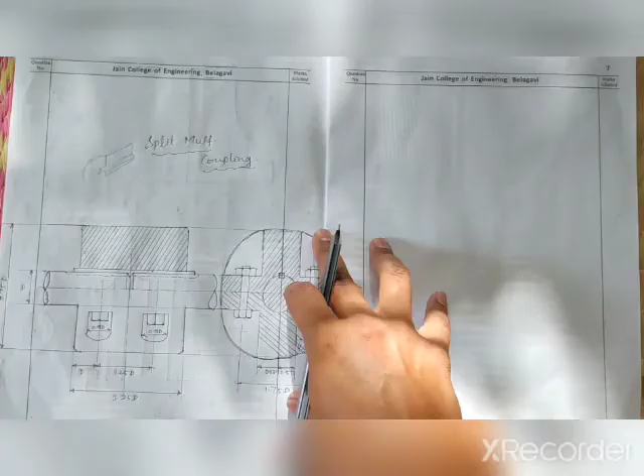Okay, we will be discussing the first type of rigid coupling, that is split muff coupling.

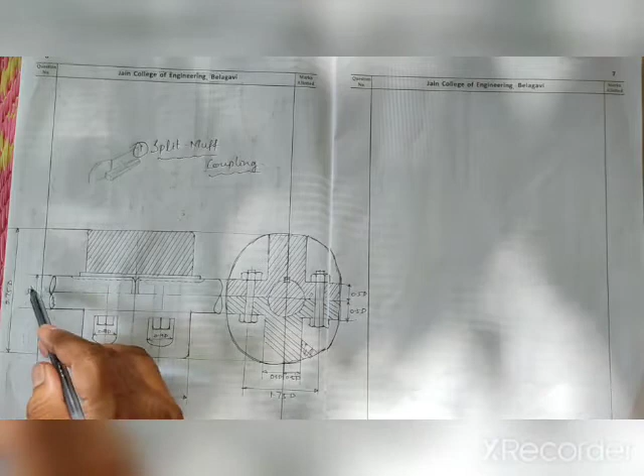Let me explain what all the things are there, then we go for drawing it. First the diameter of the shaft will be given to you, that is D. Based on the diameter of the shaft, the remaining dimensions of the split muff coupling will be present.

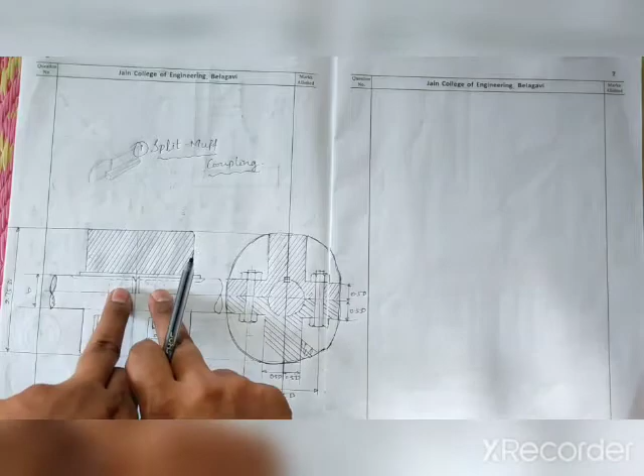Split muff coupling is nothing but a circular muff on the two shafts which are to be joined. When these two shafts have to be joined, an upper half muff and a bottom half muff will be there, placed over the shafts, and it will be tightened with nuts and bolts like this. So this is how the split muff coupling will be.

In the previous I have shown the 3D view also, I hope you are convinced with that. Now let us go for drawing the front sectional view, the front half sectional view, and the side sectional view. It's very simple, so how to draw the things?

Make it convenient according to the dimensions, you have to plan it properly on the sheet.

Now, first and foremost, you have to take the axis line, that is the chain line. Draw the axis line, and once you draw the axis line, draw off the shaft there only.

Everything you do first with thin lines itself, that will be a better way. Do everything with thin lines.

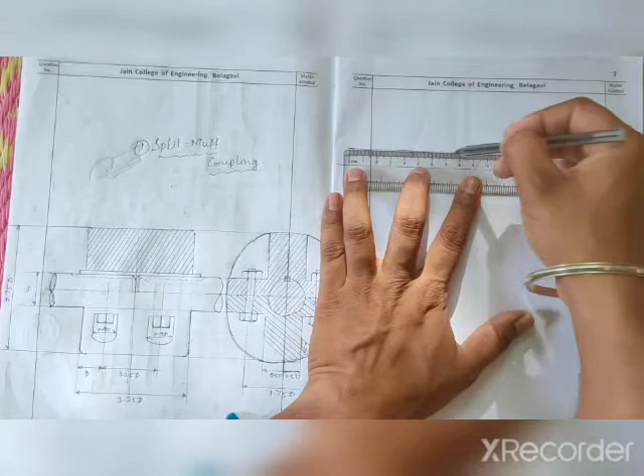Make sure I need to draw this side view here, so till here only I will take it, with thin lines.

Now let me take, for my reference, a center axis line, also thin line, for my reference I will take it as the center axis line.

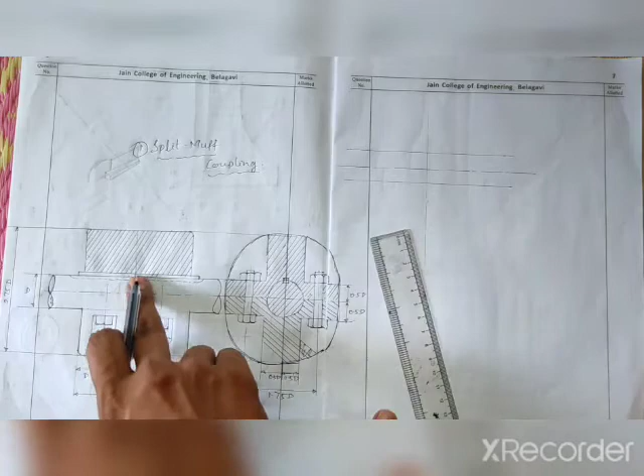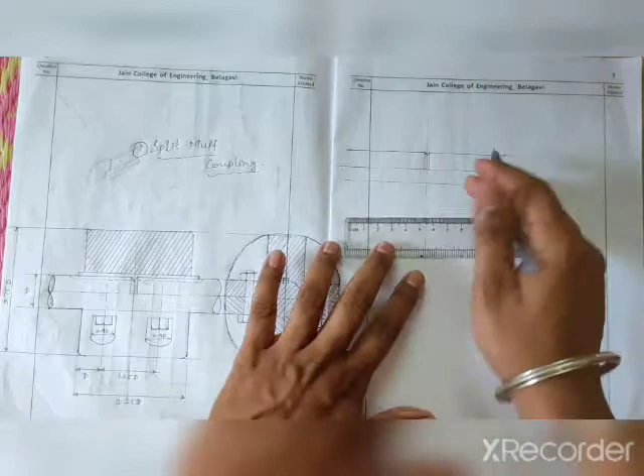Now here you can see the upper half portion, I will show it with section, so I can see the shafts which are there. I start with this point, make it like this V shape, and then draw a line here, and for this one also a line, and for this one also a line, and then here you take it straight, and here also you take it straight. So that is a thin line as itself.

At appropriate distance, let me do it later. Now let me take this width first, and draw it here on both sides, on both sides you have to draw.

So for this width and diameter you need, you can see here, this is 2.75D and the width is 3.25D. Taking these two dimensions, 3.25 into D, D meaning diameter of the shaft, and 2.75 into D, you have to calculate how much it comes.

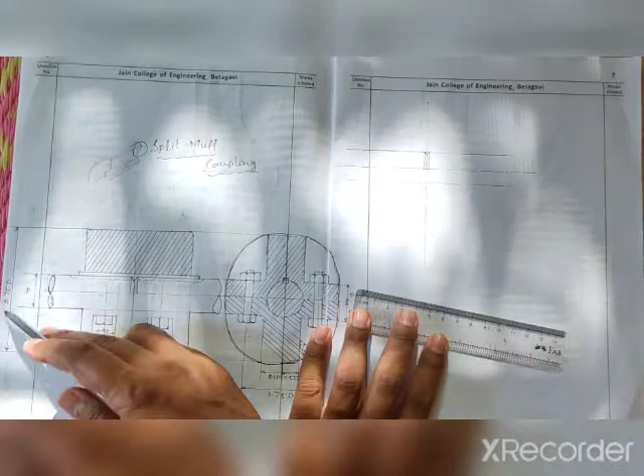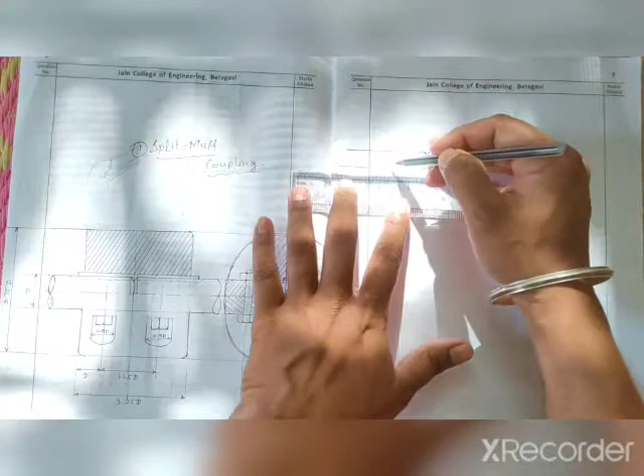If it is of 20mm diameter, 3.25D means it will be 65mm. Similarly 2.75D means it will be almost 55. So that diameter, 55, means now it will be half on this side and half on this side from the axis, half of 55 is 27.5 here and 27.5 here. Like that you have to take it.

So just mark it here, mark the points. At this point, obviously you will be working on grid sheets, just draw off the thin lines.

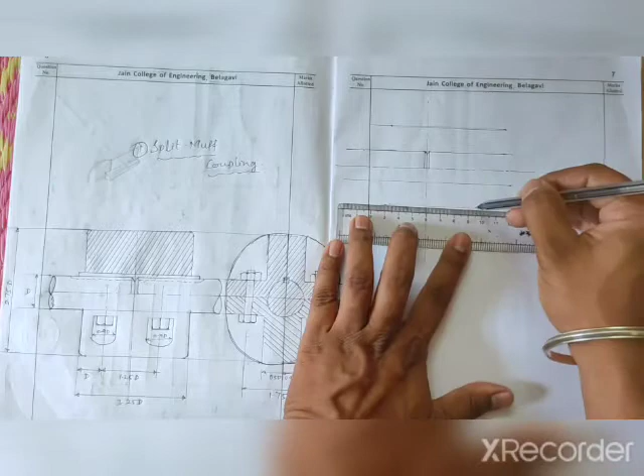Now for the width, how much is it? It is 3.25 into D, so half of that on this side and half on this side. Like this you have to work, so here again go for vertical thin lines.

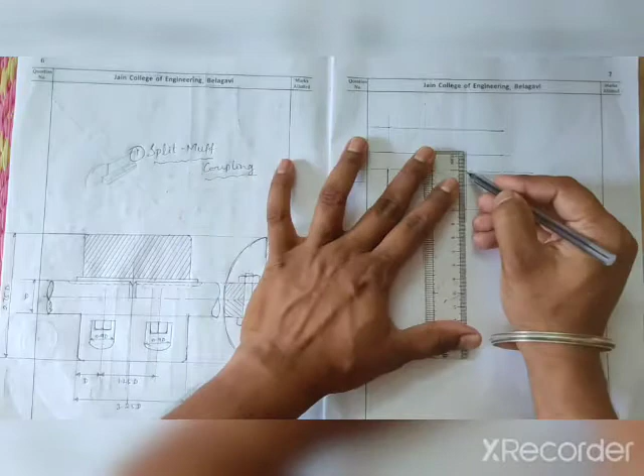Now go for making the thick lines, wherever it is required. Now this bottom portion I have to show fully with thick lines, so from this shaft, from the axis, I will take it thick till here. Corners I need to show rounded.

I will leave the corners and by hand just round it off.

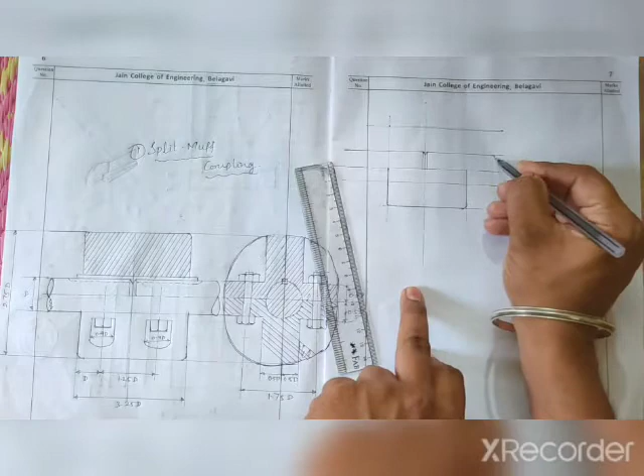Then here at the upper portion, here it is a sectional view, so now we got to know these distances. What you do is, you have to finish showing it as an endless shaft, shown like this curve. Now when you show the curve here at the bottom, you show it here at the upper part too, like this.

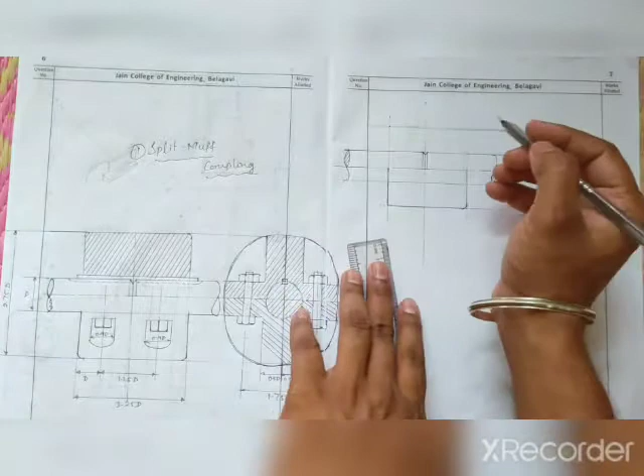So this is how it will be. Okay, now I got to know these dimensions. Here the width, how much it will be. So these two lines, now you just show the keyways.

Just with dotted lines, with free hand only, you can show the keyway. Key for the space, and show the key there itself. So like this, with approximately 2 to 3 mm distance, you can take and show it off.

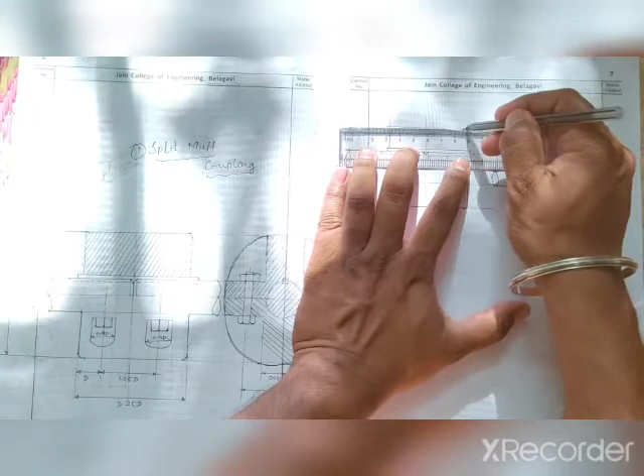So that's it, the key and the upper portion. Here it is a hatched one. Why? Because we are taking the upper section as a sectional view. So it is a half sectional view, the upper half of the axis.

So this is the axis, this line is the axis. Upper half of the axis will be hatched lines, since it is sectional. So the bottom half will be the front view, how it appears from front. So the upper portion is hatched.

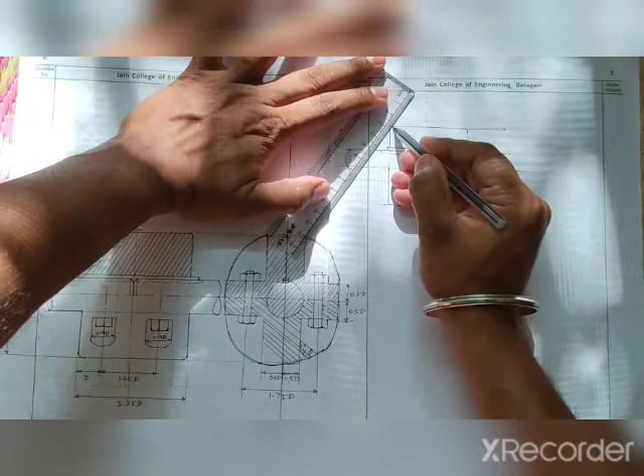So hatch it at 45-degree lines with 2 to 3 mm gap. Hatch it like this. It is a whole single body, so hatch it properly like this.

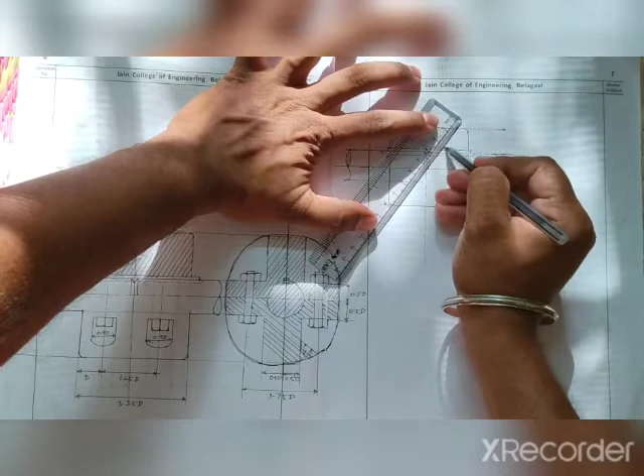You need to do it at that time only. That will be a better way, because you will not get confused later. So this is the hatching portion what we have done.

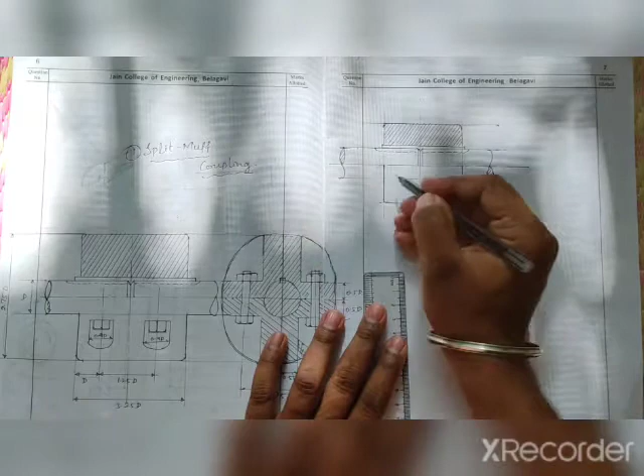So next, the bottom portion below, I have to draw these two things. So these two things you have to show here. The distance for this he has not given. You can take it approximately from this shaft, at this distance I will take it here.

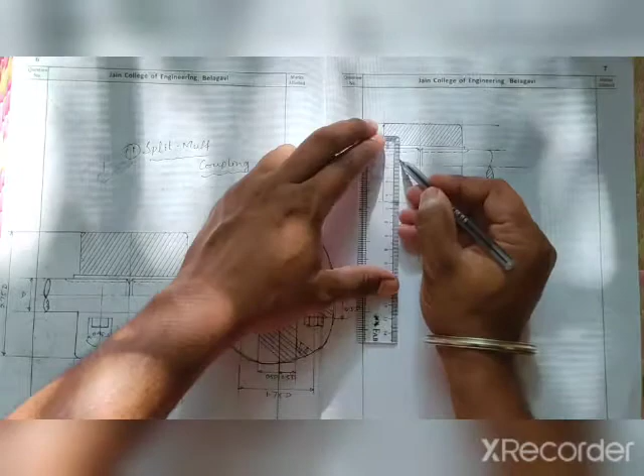Now here you have to just take the width he has given as the axis. D, and this is 1.25 D. So these two, from this side he has given the dimensions, from the left side. So at D distance, take D distance, that is 20 mm. If it is 20 mm, take D distance, draw off the axis here, thin axis line.

So everything I have told you, everything has to be thin lines. Later whatever is needed, those things you have to make thick lines. So now here first I will draw. It is of 20 mm, meaning from this axis 10 mm this side, 10 mm this side.

10 mm this side, 10 mm this side, from this axis. So like this you have to do it.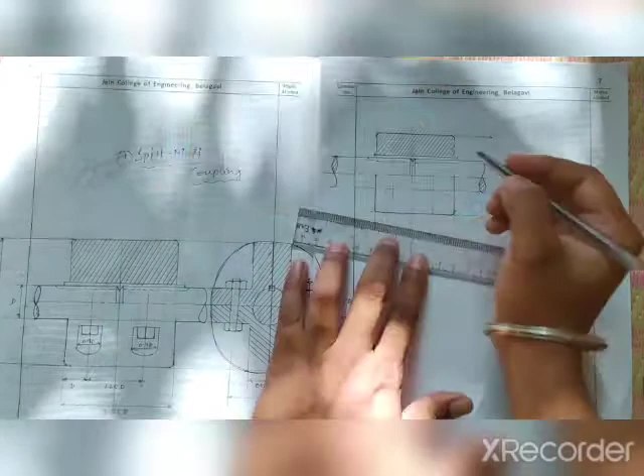Now just take it straight down, round it out. Take this one also straight down, round it out. And here inside of this we have to show the nuts.

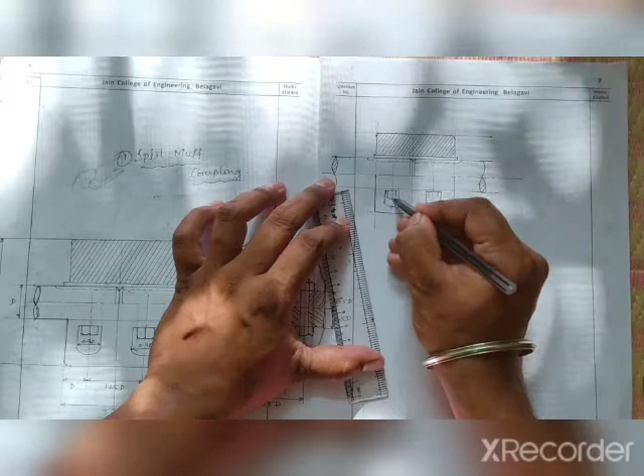So to show the nuts, just draw two lines like this with reference to the axis. Show this like this. You have to draw a U shape and round off, U shape and round off, like this. Just draw off a line. This is how we show it.

So next, here also everything is done. Just you have to show the dimensions properly. Whatever dimensions you have taken, show it there. So you have to show like this.

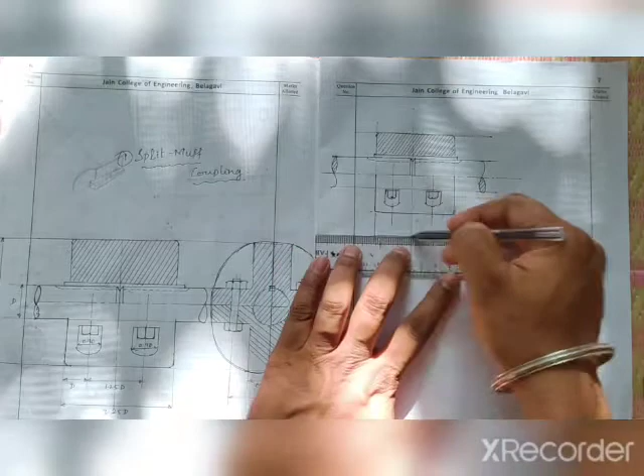Just draw off the dimensions, whatever D he has given for you. Based on that, how much dimensions you have taken. So he may give D as 20 or 25. Based on that, how much you have taken, you have to show those things here.

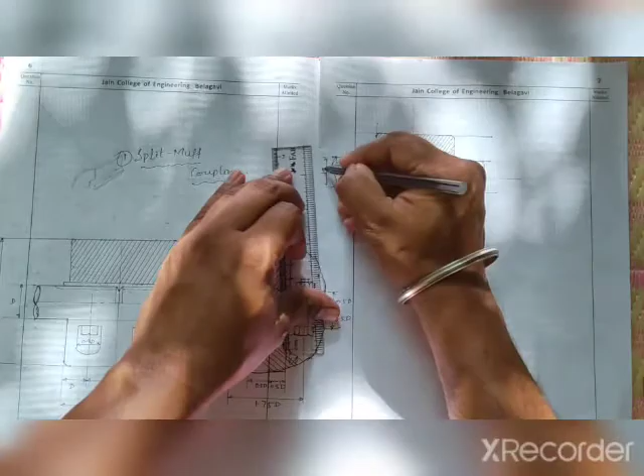Now for example, yeah, this is D, this one is D for me. So like that you have to show the diameter also, how much you have taken. Just project these two here straight forward, and you have to show the diameter of the muff also. You have to write how much it is.

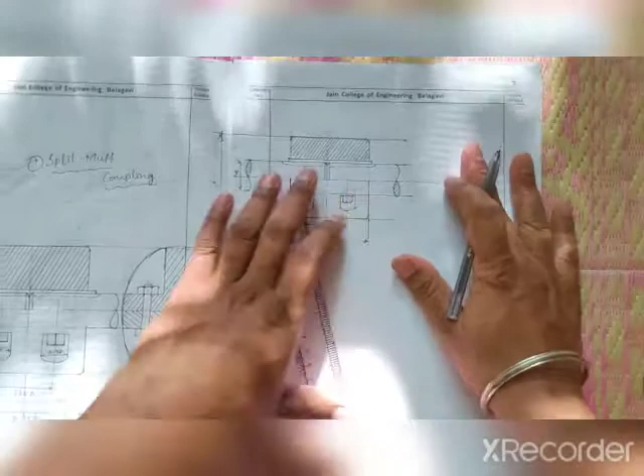Next let me come for the side view of this one. Let me come to the side view. So here now just extend this axis, extend this mid axis. Just a minute, I hope now it will be much more clear for you. Extend this axis.

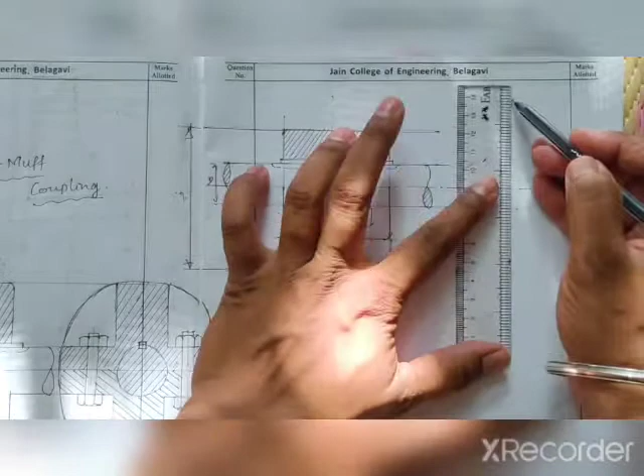So here what you have to do is take a vertical line, at an appropriate distance, since I need the center point to draw that circular view. So this as a vertical section line and horizontal axis line, vertical axis line and horizontal axis line.

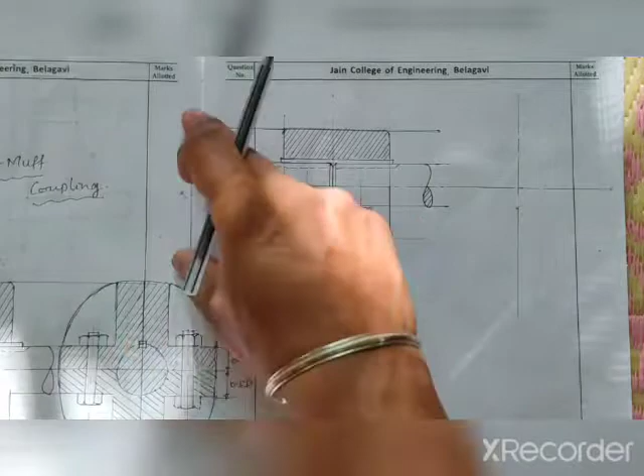Now the diameter, you know, of this circle is nothing but 2.75D. I know it, because here we have taken that dimension. So take that dimension, taking this as the center point, draw off the circle. Just taking this as center, draw off that circle, with thin lines first.

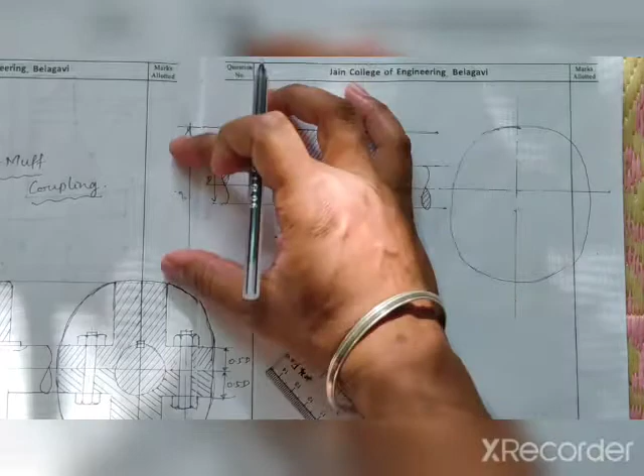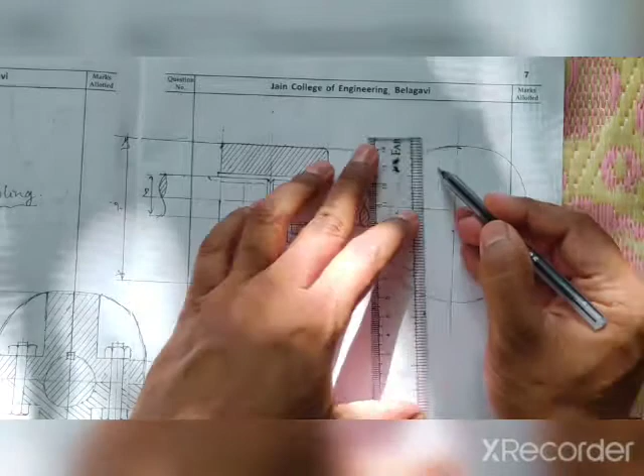So take a circle of this much diameter, 2.75d, that much diameter, we will draw a circle. Next, he has given here this width 0.5d, 0.5d, and here also 0.5d, 0.5d, from the axis: 0.5d this side, 0.5d this side. Like that you have to draw it here. So 0.5d, that is, if the diameter is 20 mm, you have to take 10 mm. Here it may be given 20 mm or 25 mm, depending upon the question.

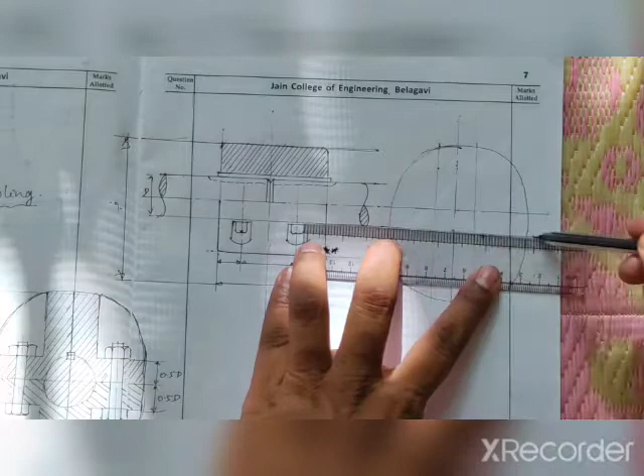Now for 0.5d you have to draw a thin line, a very thin line. Here also 0.5d, very thin line. Similarly, from the axis, 0.5d this side and 0.5d this side. Draw very thin lines, because later whatever is necessary for us, we make it. Now, which things are required for us? This one and this one till here, because we have to show it like this, where it is being cut.

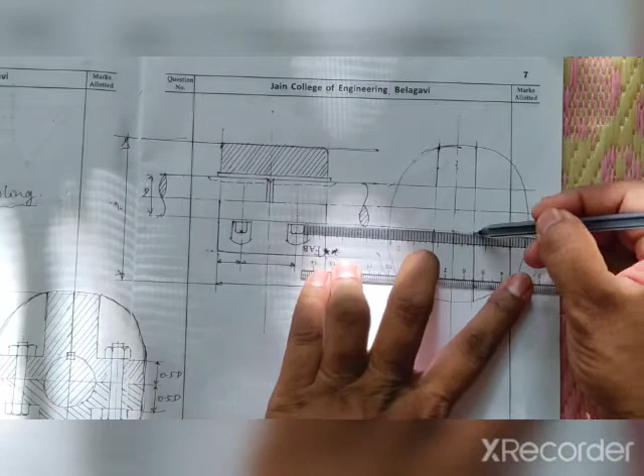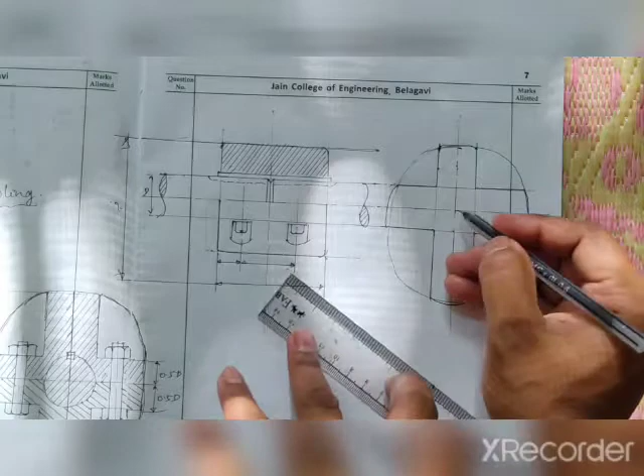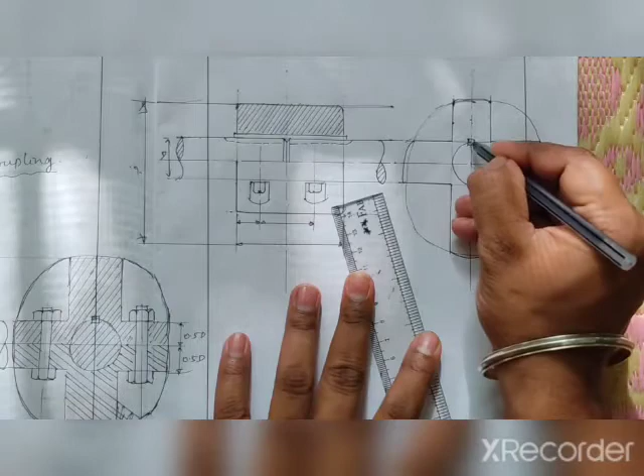So this and this and this. Now this will not be a thick line, only this much will be the thick line for us; this and this will not be thick lines. Now I need to show the shaft at the center with the locking key, and then these two shafts. First let me show the shaft: taking this as center, draw a circle of diameter d, and here show the key approximately like this.

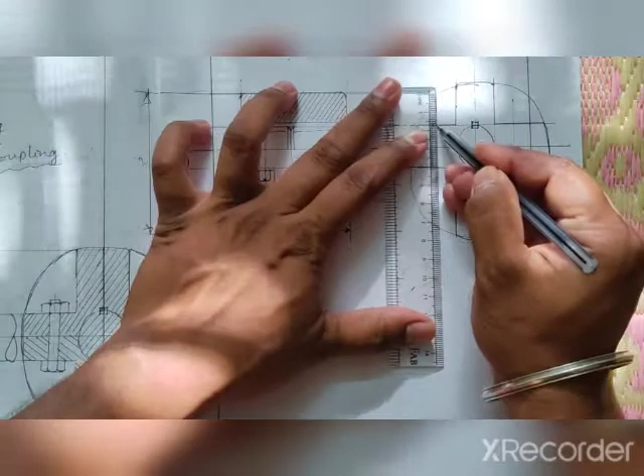Now I have to show the nuts and bolts. Between the two axes of the nuts and bolts he has given 1.75d. So from the mid axis, half of 1.75d this side and half of 1.75d this side, and the same here also. Take those dimensions and draw the axes first as thin lines. These dimensions are not much required; just draw it freehand like this, approximately proportional.

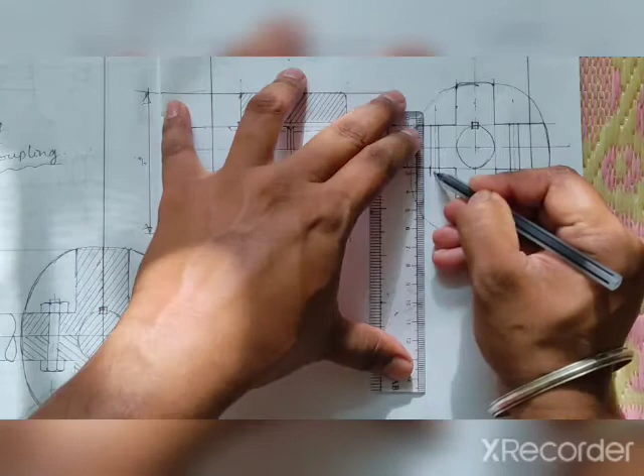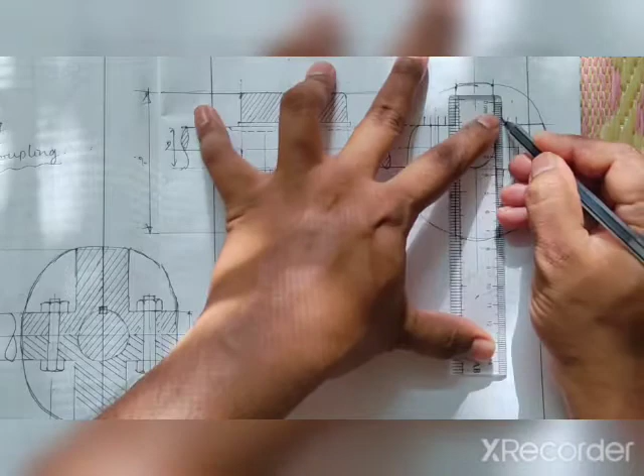Now to draw the head and bolts, there's a very easy method. Draw two lines like this; let me do it for one. Take half of this distance and draw it this side and this side. Similarly here, extend these two for some height, not larger, and take half of that this side. Do the same here also: extend these two, and at the side draw two lines of this width.

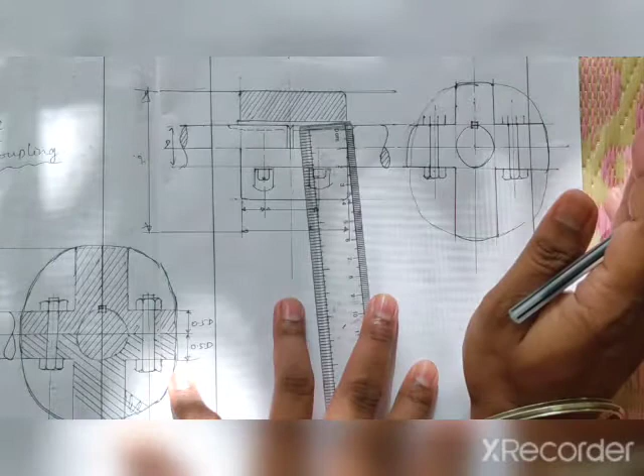Now, very simply, how to show it. This is the head part: draw arcs like this, and join this point to this point with a line, that's it. That is the easiest method to draw the heads. So this and this, just draw the line. Same thing everywhere, draw a line like this. Now all four look like heads.

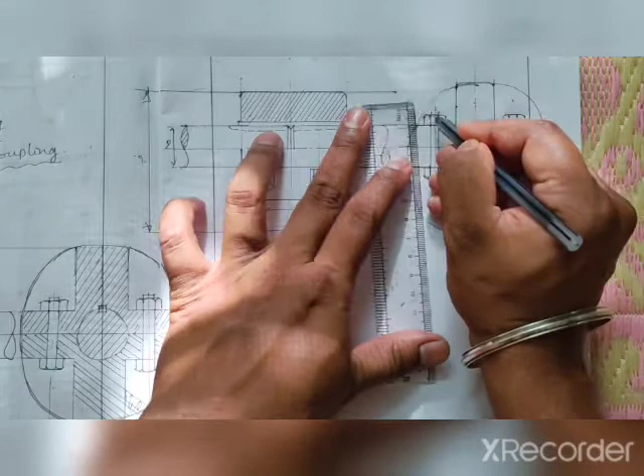Now which is the head and on which side we have the nut? I take these as heads, and here we show a bit of the bolt extended, like this. That represents that this side we have the bolt and here the head of the bolt, and these are nuts. So now we have done everything for this one.

Now the hatching part. As I told you, 45-degree line hatching. The upper portion above the axis line is one whole split of the muff, and below the axis line is the second split. Half of the split muff is upper and half is below. So if I show this one at 45 degrees towards this side, this will be 45 degrees towards the other side, like this.

Okay, let me do it. And while doing it, just one thing you have to take in. If it extends here on the same part, you have to draw the hatching lines like this. This is a perfect method to draw the hatching lines. Wherever they pass, you have to draw it there like this. Okay, like this, you have to draw it.

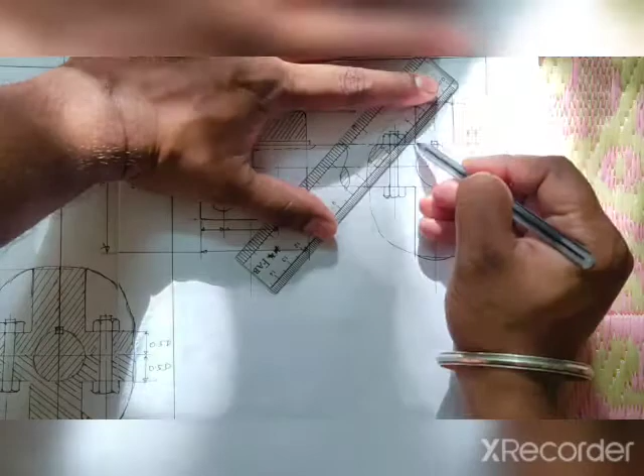So just move your scale like that only. Hold it properly and move. If you have a roller scale, that will be better. So here is the shaft. Remember that one. Don't go outside. Don't go below the axis line. Below the axis line is different. It is the other half of the split muff that we have.

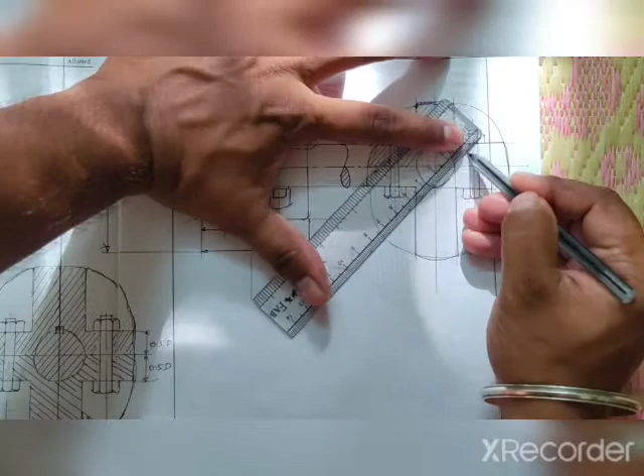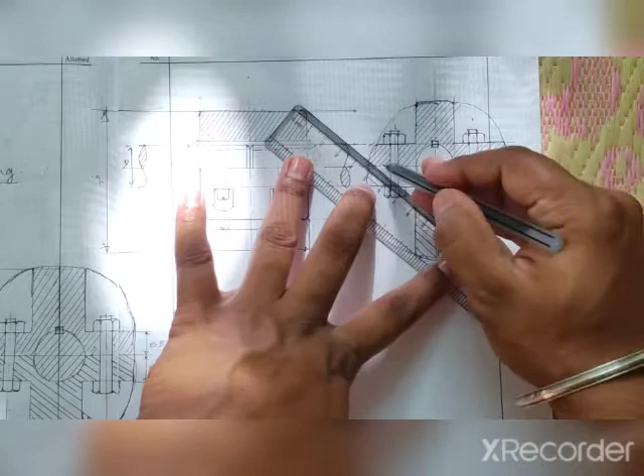Like this. Then this one. Let me start it from here. It enters here now, so I will draw on both the sides. Yeah, here also it comes. Now just go on drawing straight lines. If you do it like this, it will be very perfectly done.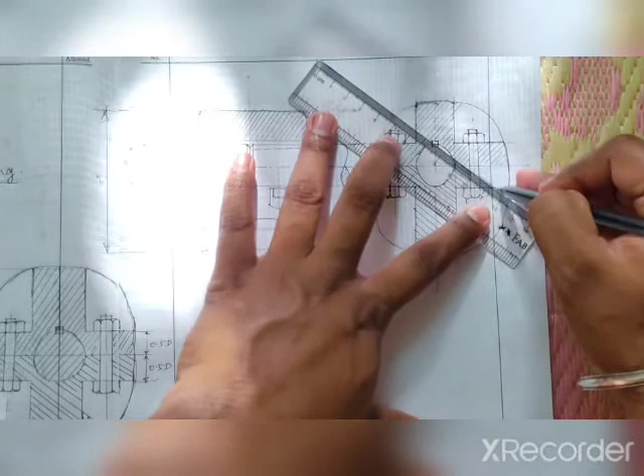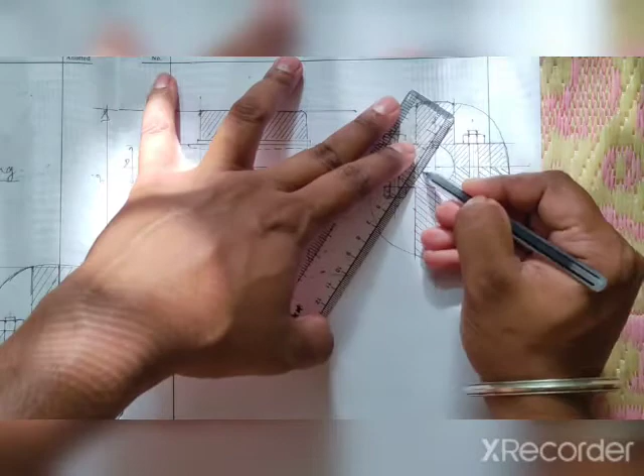After doing it, you feel happy looking at it, how similar it is, how uniformity is maintained. So that will be better. So like this hatching. One upper half is this way, bottom half is this way. Now this one you take either this or like this. The shaft you show in another hatching. Fine. So this is how we do the front half sectional view and side view.

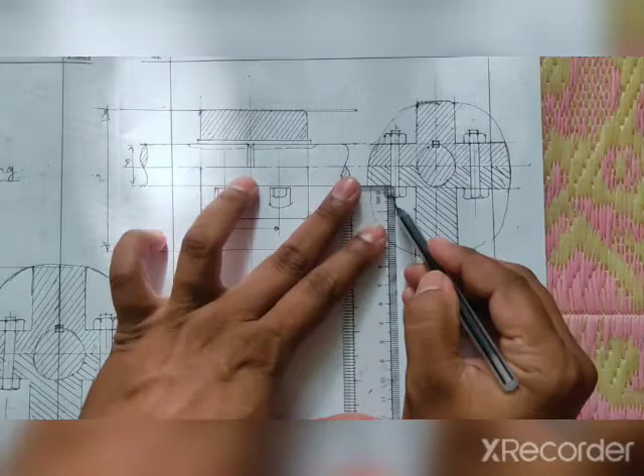Yeah, I forgot to show the dimensions. Don't forget to show the dimensions here. This one, how much you took, that is 0.5D, you have to write that. Here also 0.5D, you have to write that. Here also, between these two axes, whatever dimension you have taken, you need to write it. That is nothing but 1.75D, but calculate how much you have taken and write it there. I hope you all understood this one.

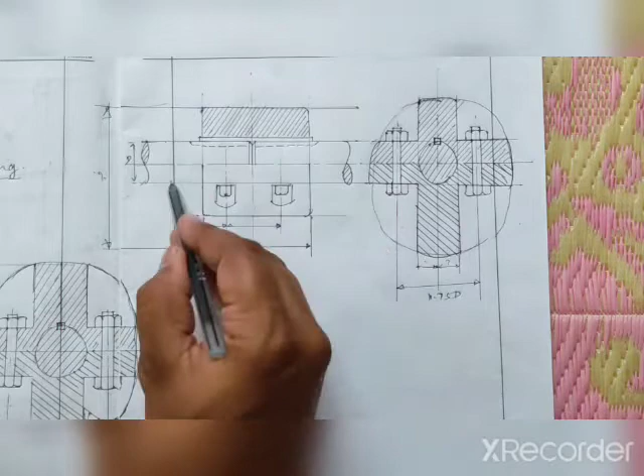So once again, in short, I repeat it. First you have to draw the axis. Then you have to draw this one. Take the diameter of the shaft and draw two shafts. Then at this one you have to make an S shape, draw lines here, and then split it off. So I will get two shafts here. I can represent two shafts.

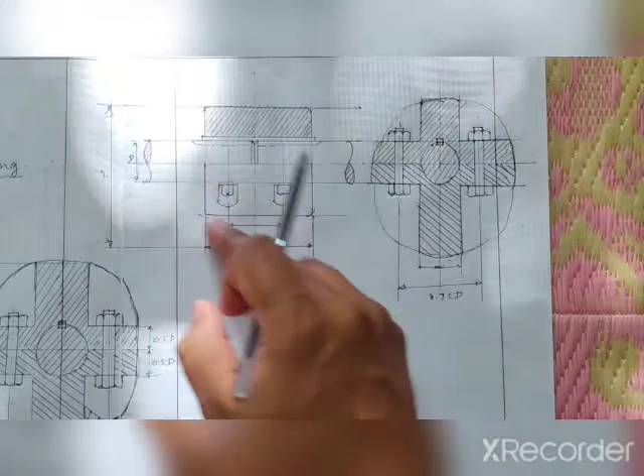Then first is the outer diameter. We place the outer diameter and width, make a box with thin lines, then make it with proper thick lines. Remaining things you make with thick lines so you get the proper shape. Next, these two things have to be drawn and show the key, the keyway with dotted lines, and the upper portion half of the key. So that's it with the front view.

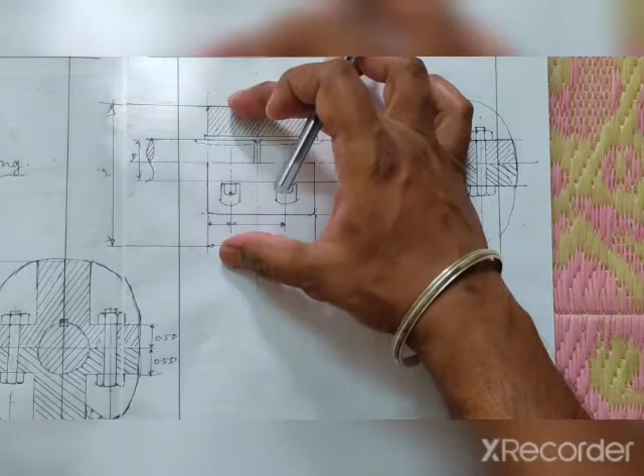Then come to the side view. Just project this axis here. Take one more vertical axis as a reference. Then this circle with the diameter 2.75D. With that diameter, taking this as the center point, draw the circle. That is the outer circle with thin lines.

Then 0.5D this side, 0.5D this side, draw two vertical lines. Here also from the axis, 0.5D up, 0.5D down, draw two horizontal lines. Where they meet, make only these thick lines. Only this much you make thick. When you make this much thick, the remaining arcs here, only that much you make with thick lines.

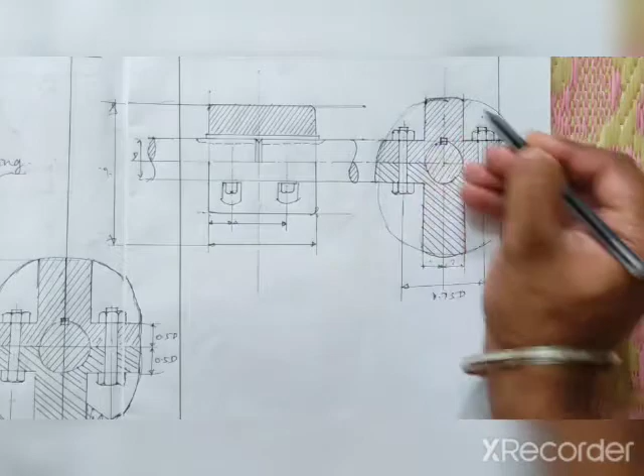Next, the shaft is there. You have to draw the D diameter shaft, and there, half the key has to be on the upper side and half inside the shaft. Like that you have to draw the key. Then these two bolts.

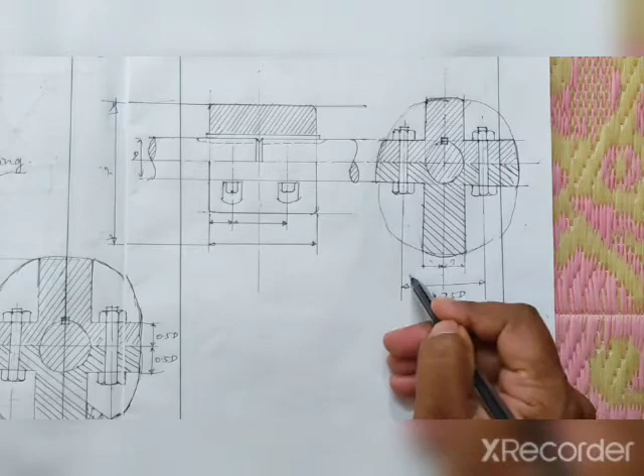You have 1.75D given, half of that on this side of the axis, half of that on this side. Draw two axes, just approximately. Fixed dimensions are not needed here. There will be proportional dimensions, but while drawing this coupling, we don't concentrate much on the dimensions, approximately just proportional.

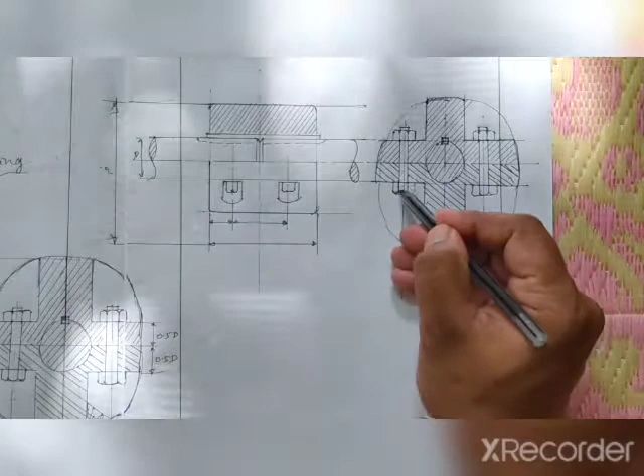You have to draw two diameters, just extend it here, same width on this side and this side, draw the arcs and draw the straight line. So this makes the head of the bolt. On the nut side, these extra portions you have to show so that it represents we have nuts here and the head here. So like this, and show the dimensions. That's it regarding split muff coupling.